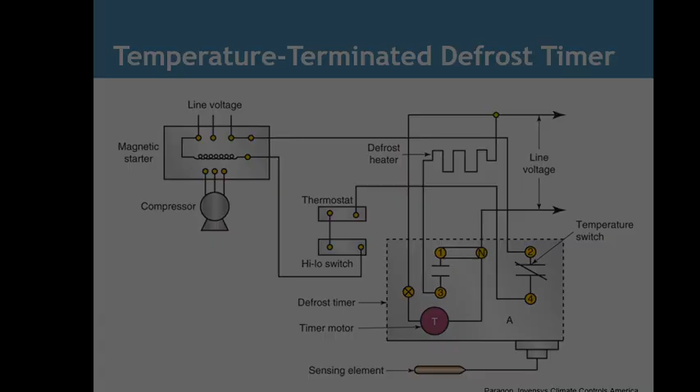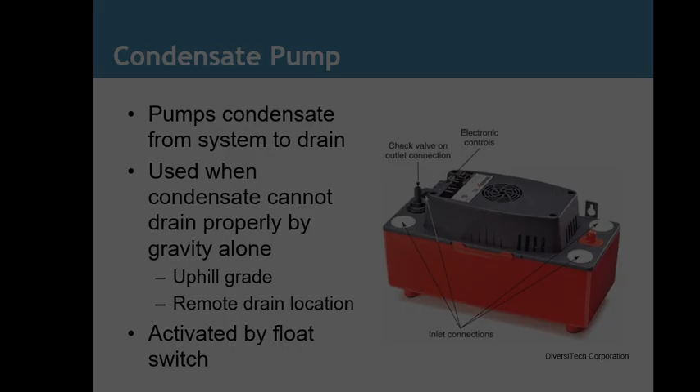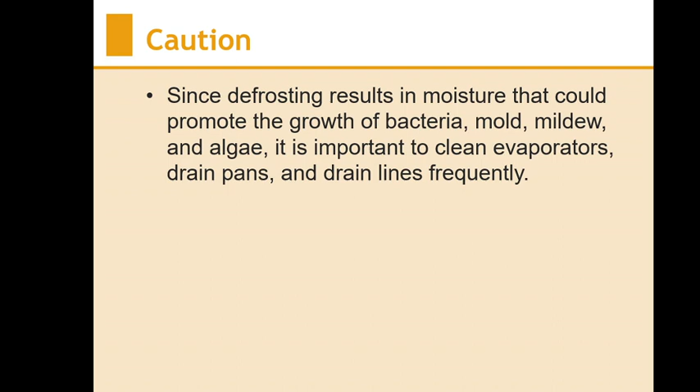Caution: since defrosting results in moisture that could promote the growth of bacteria, mold, mildew, and algae, it is important to clean evaporator drain pans and drain lines frequently.

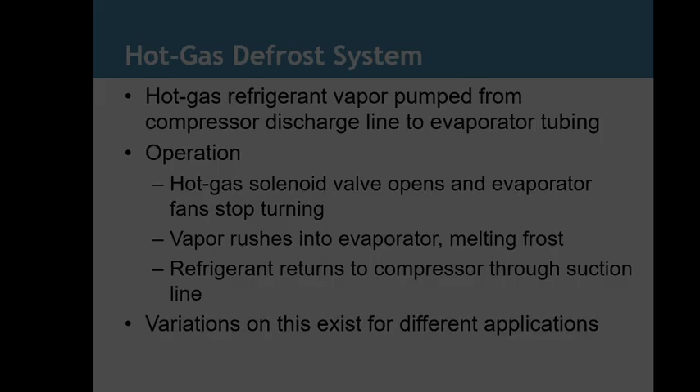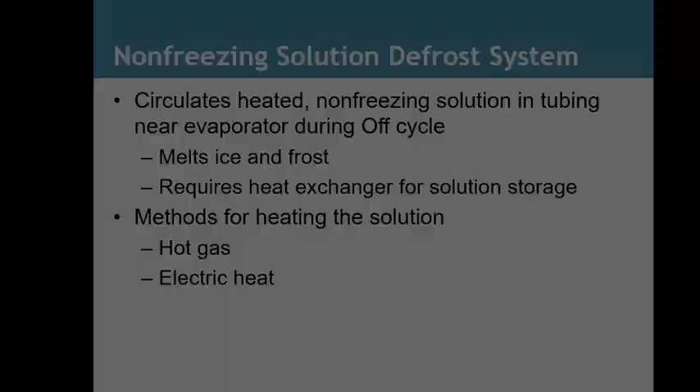Non-freezing solution defrost system. Again, it's hard to see on this, but you may look at it in your book.

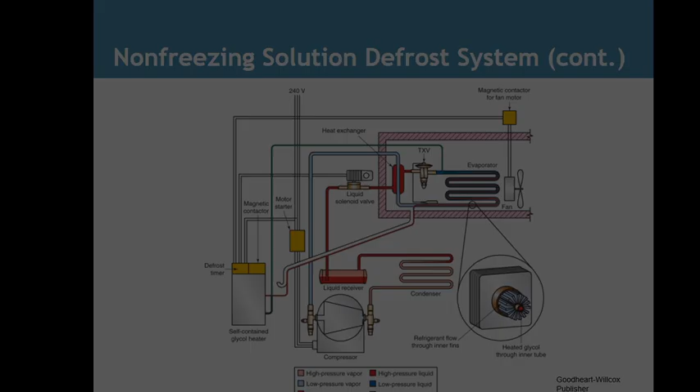Water defrost system. Tap water runs over the evaporator during the off cycle - a manual or automatic system, with water drip or spray to melt the ice. Water must be drained completely before turning the unit on to prevent freezing.

Some systems use a lithium chloride brine solution - this is that solution we talked about earlier. It doesn't freeze very fast, but again, the system has to have time to get the water off the coil, because the minute it comes on, especially if it's a low temperature system, it's going to freeze up immediately.

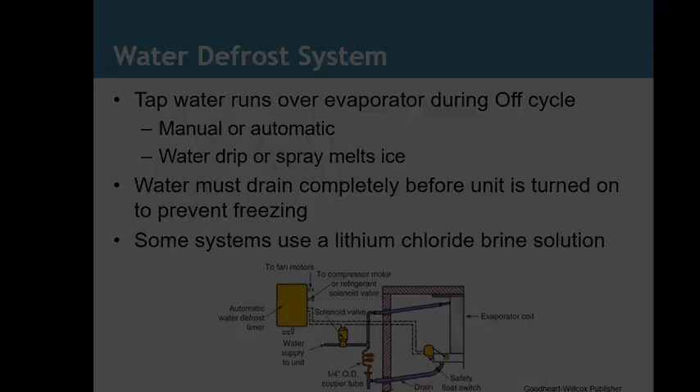Electric heat defrost system: electric heat coils in or near the evaporator. Sometimes they're run completely over all the evaporators, depending on how much they have to defrost and what sort of time they have to do it.

Elements are placed underneath the evap coil, underneath the drain pan, and along the drain pipe, to keep that all from freezing up inside. Because again, these units will defrost and lose a lot of water, so sometimes the electric element is running right down the drain to the outside.

Double wall, tube within a tube evaporators - this is where they have two tubes that run together, one inside the other, that uses the defrost fluid.

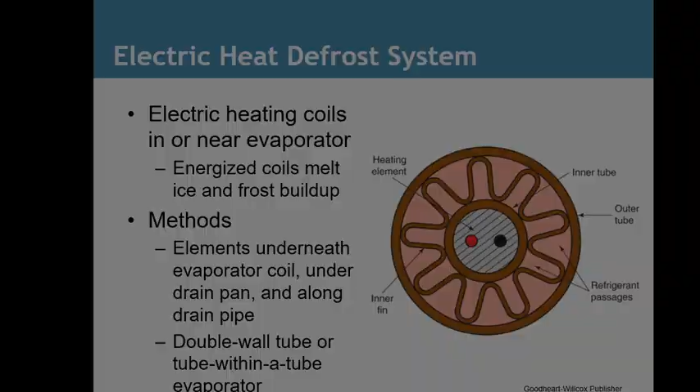Off-cycle defrost system circulates air from the conditioned space over the evaporator during off-cycle. Evaporator fans continue to run to circulate the air, and the heat in that air will melt the frost. This can only be used in an air-conditioned space that is above freezing, so you couldn't use this in a freezer. It would take forever to defrost that way.

But if you're in a system where your coil might freeze up because of certain conditions, where you're taking a lot of humidity out of the air, then blowing air across the coil for 10 minutes won't change the air temperature much in the conditioned space, but it will defrost the coil.

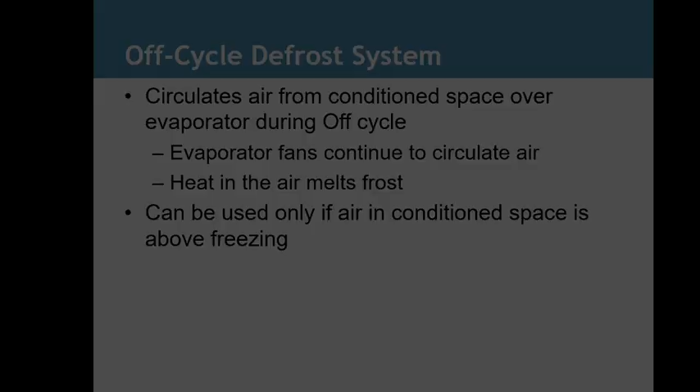Pump down defrost system: refrigerant is removed from the evaporator to expedite defrosting. It actually pumps the refrigerant out of that coil so there's no refrigerant in it, just pulling a vacuum on it. The refrigerant is stored in a liquid receiver, which we've covered in previous chapters. This is often used in conjunction with other defrosting methods, such as electric heat defrost.

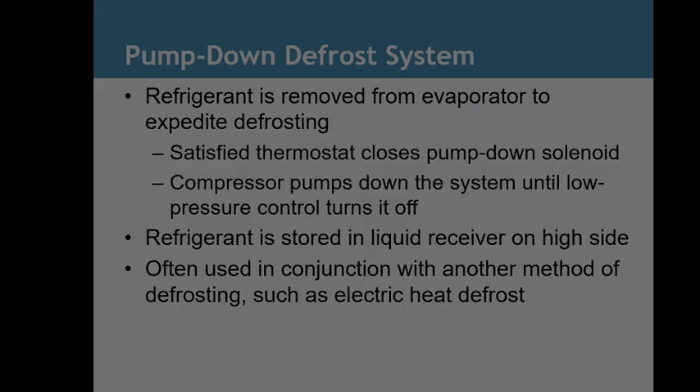Condensers remove heat from a circulated medium, remove superheat from refrigerant, condense vapor to a liquid, and subcool high-pressure liquid refrigerant. Types include air-cooled, water-cooled, and evaporative-cooled.

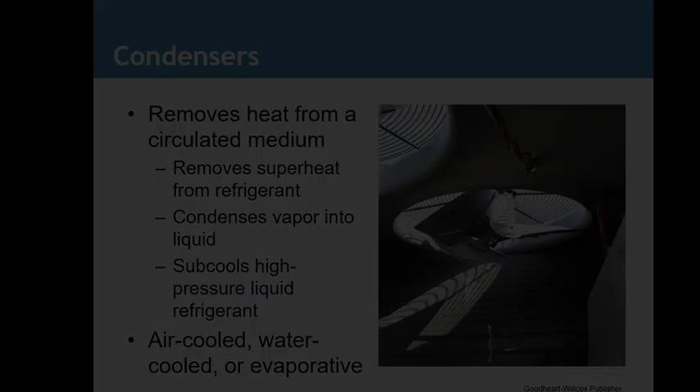Air-cooled condenser: heat is moved from the refrigerant by air, either natural convection or forced draft. You could just put a coil in the open, say on a roof, normally in shade, and the outside air will cause that coil's temperature to drop, depending on the size of the coil. Or it has a fan that blows air across it. These are typically installed outdoors, on outside walls, roofs, pads on the ground level, or brackets on a platform.

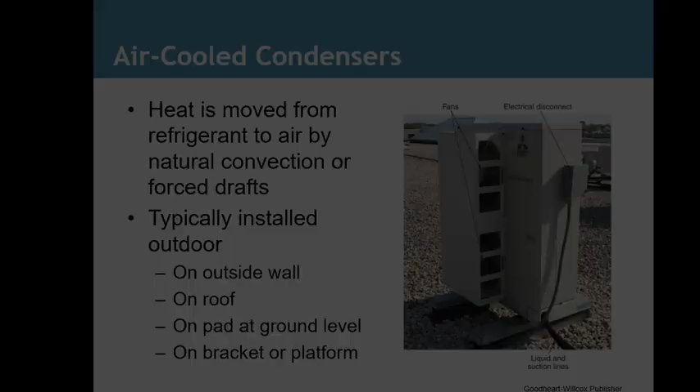Water-cooled condensers: heat is removed from refrigerant by flowing water. The flow of water is controlled by an automatic water valve. They provide better heat transfer than air-cooled. The three basic types are shell and tube, shell and coil, and tube within a tube.

Use of water-cooled condensers depends on access to water and associated cost. In the state of Florida, we probably have more water-cooled systems than anywhere else in the country because we have water everywhere. Usually if you're near a lake, you can run a copper line into the lake. It's not actually pulling lake water, but circulating the refrigerant or water that's cooling other refrigerant through the lake, just to drop the temperature of the water inside the coil. It doesn't mix, and that's used to cool your condensing unit. They're very efficient, usually 10% or greater improvement over air-cooled.

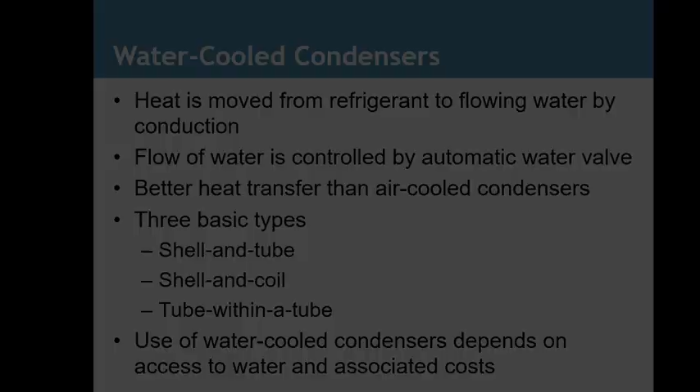Here's a diagram or picture of a shell and tube condenser. Again, you separate the water that cools it from the refrigerant, with the water inside the copper tubes.

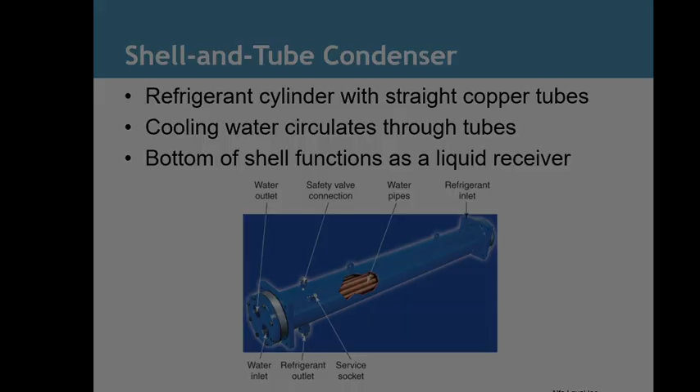Shell and coil condenser: again, the cooling water goes through a tube inside the system with the liquid refrigerant, and it cools the liquid refrigerant, shown as the red substance, while the water runs through the light to dark blue substance.

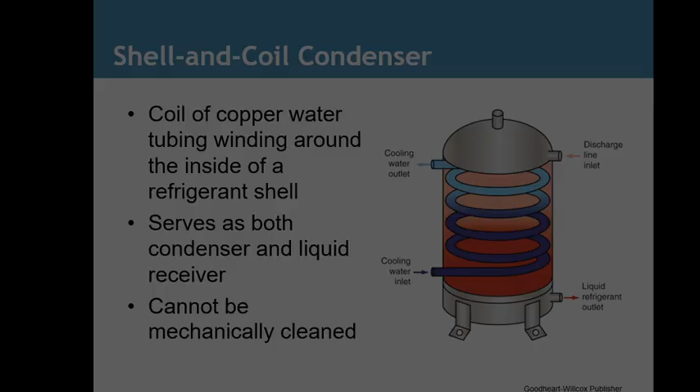Tube within a tube: they actually have a tube of refrigerant, and inside that tube of refrigerant there is a water tube. So wherever the refrigerant goes, the water is in the center of that coil, removing the heat off that refrigerant.

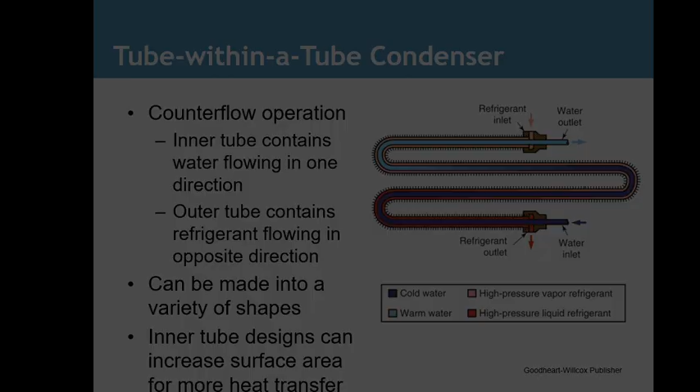Evaporative condenser uses spray water droplets and drafts from fans to cool the coil. Configurations include counterflow design and combined flow design. Operational considerations include being designed to handle wide load variations. Capacity control is possible through the fan cycling on and off.

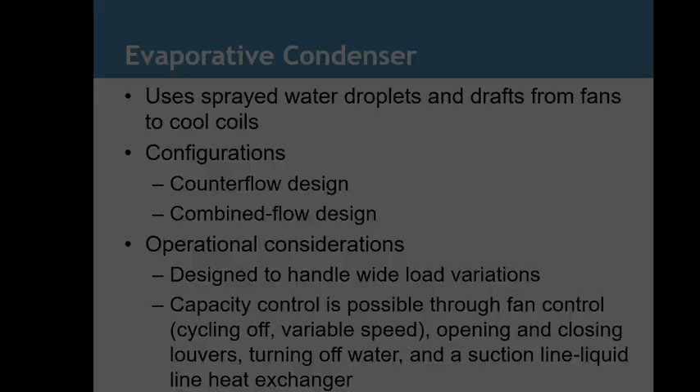Here's a diagram of an evaporative condenser, and you can see more in the book.

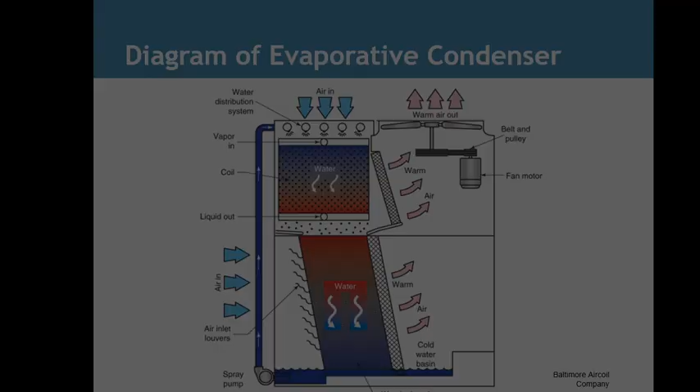Residential air conditioning condensers are mostly air-cooled. You see very few water-cooled, maybe 2%. They vary widely by manufacturer—all of them look different, all different shapes. I've even seen ones that look like a table, where the fan was on the bottom and the coil was on top, allowing air to be sucked in from above through the bottom.

They have housing, protective fins and tubing, with fans positioned for maximum airflow across the coils. This is real important—you see a lot of pictures and videos where guys are setting their tools on top of the fan. You shouldn't do that, it blocks airflow. If you're trying to get an accurate reading of how the system is charged and how it's working, blocking some of the air is not a good thing to do.

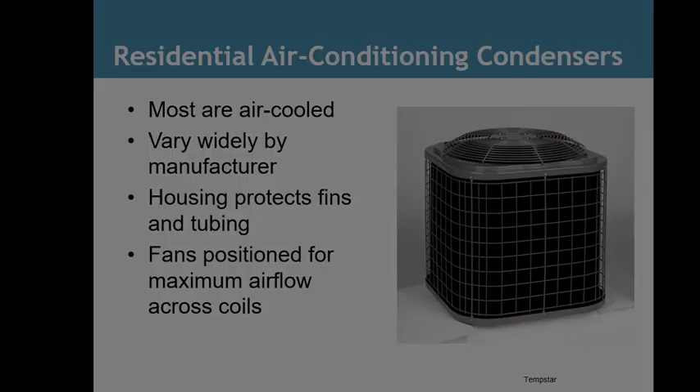Commercial air conditioning condensers are mostly air-cooled, with the same function as residential units, and they vary widely by manufacturer. We have units on our roof of the school that look kind of this way. They're not as big as this, but they're just condensing units usually.